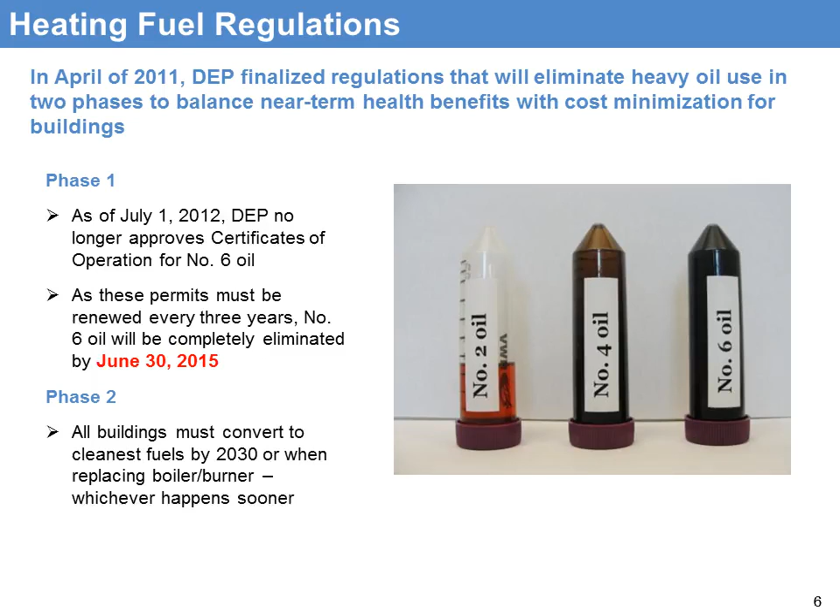When the regulations were put into place, the city and the mayor's office also put together our program in an effort to basically help folks with this transition period. We provide free technical assistance through the process. We'll guide buildings through the conversion, whether it's liaising between all the city agencies, understanding the regulations, the timelines, and everything else that you need to strategize which fuels you might need to go to. We can help you with that.

We'll also help connect you to any financial assistance that's available, whether it's incentives or financing that's on the table right now through partner organizations. And we've developed a website that a lot of folks use, not only to get information about the conversion process, but also to get a wealth of information about incentives. And of course, a lot of folks check our Spot the Soot map, which basically maps out every single building in New York City that has to comply with these regulations.

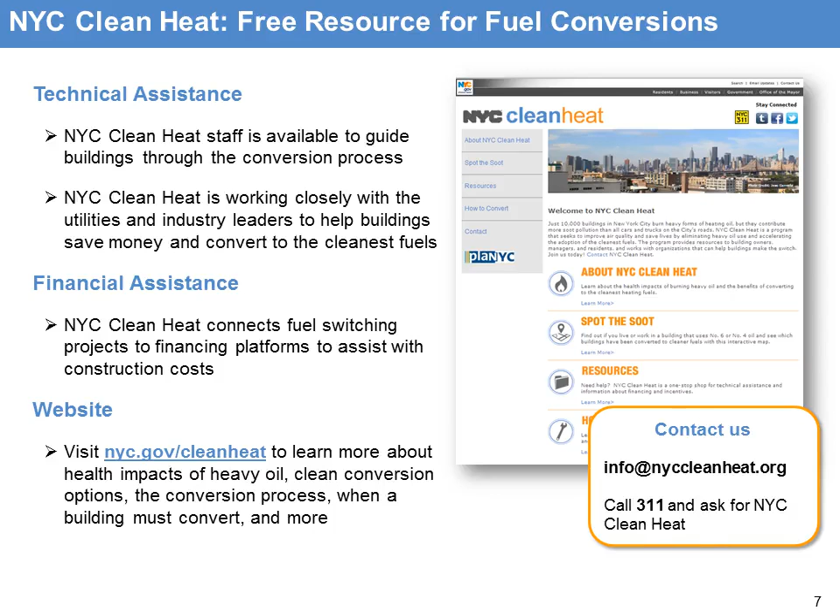Some of the target fuels that we're encouraging folks to look at are obviously the cleaner ones. As I said earlier, 6 is already finished by this summer, 4 oil is on its way out, so we never recommend those two as an alternative. We look to the cleanest fuels as a great way to transition: ultra low sulfur number 2, biodiesel blends, natural gas, steam, and any other alternatives that are out there are all great choices.

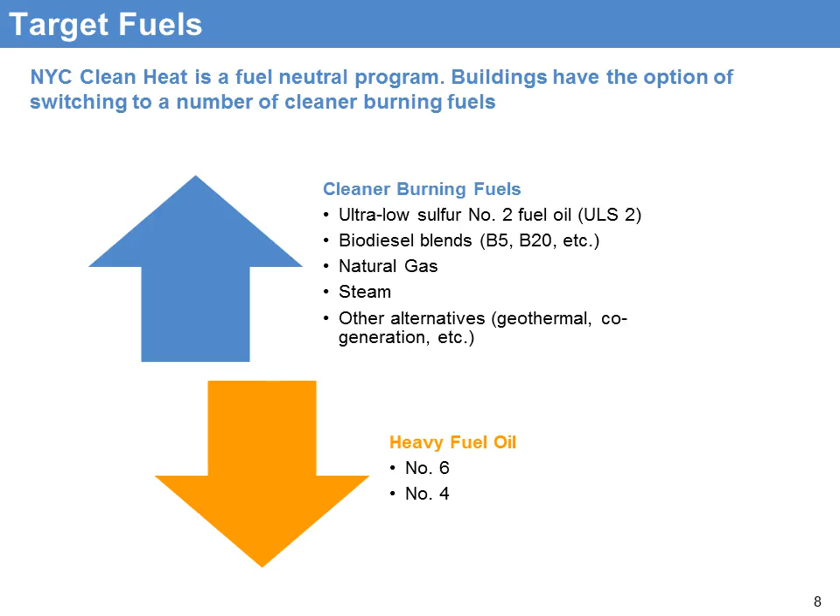Now, just getting into some of the consequences of not complying with these regulations. If you do choose to operate on an expired permit — and we're talking about folks right now that might be on number 6, that are basically behind a little bit and still need a little more time — DEP is enforcing these regulations strictly, especially during these last few months.

So the first thing that happens is you'll receive a notice of violation if your permit is expired and you're operating your building on an expired permit. You'll be mandated to comply within the allotted time to convert to the cleaner fuel.

The next step of the enforcement is that you will receive a cease and desist notice from DEP. Now, along the way, I know DEP will send out inspectors, and you'll be notified and given plenty of time, but they are stepping up their enforcement.

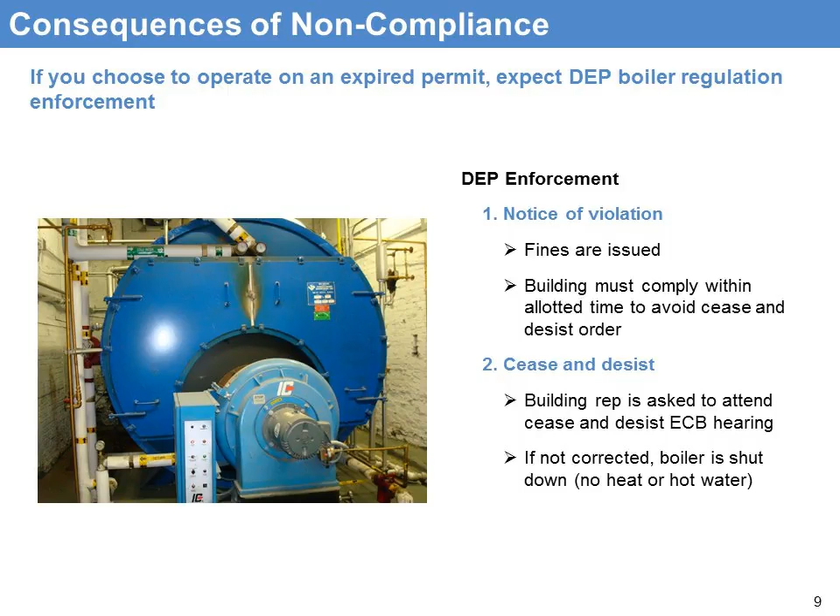Once you are issued a cease and desist, you'll be asked to go in front of an ECB judge and basically told how to correct your issue within an allotted amount of time. A cease and desist order, which DEP can then act on, basically means shutting down your boiler, which means no heat, no hot water. We don't want that to happen to any of the buildings we're working with, and certainly DEP doesn't want to shut down anyone, but they will if they have to.

There are additional consequences. In addition to being out of compliance, there are other consequences for your buildings that a lot of folks don't always think about. If you're operating on an expired permit, there might be some insurance implications — it's a non-compliant building.

God forbid anything happens, banks are starting to look a lot more at compliance issues related to buildings when giving out mortgages or providing loans to tenants or potential co-op members or new folks coming into the building. It's also a reflection of how the building is being managed.

These regulations are not new. These changes were known well in advance, and we are hoping folks would be able to plan in advance of the regulations hitting.

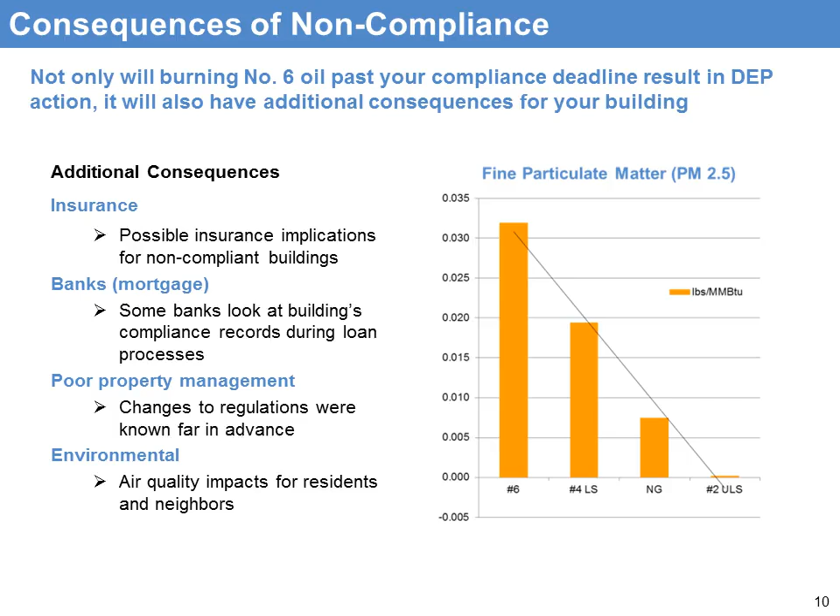So getting down to finalizing your conversion, as I said earlier, we're in these last two months. By June 30th, there should be no more buildings on number 6 oil. We recommend some quick hits for buildings to understand where they are.

You might be in the process of converting, or you may have recently completed a conversion. It's important that you understand how the DEP and us view your building, and you should make sure all your paperwork has been completed. You should double check if your engineer or contractor has done everything that was in the contract, and you want to make sure you're not getting fined even though you completed your conversion.

One really quick check you can do is go to our website at nyccleanheat.org, spot the soot, and there you'll find every single building that's permitted by the DEP. The DEP helps us to update this map regularly, so you should check there what type of fuel we have you listed as, and make sure it's correct. And if it's not, please reach out to us.

It's really important that you guys are in touch with us as much as you can be to let us know if you're having any issues or problems. That's our job, we're here to help you. We don't want anybody to be fined, and neither does the DEP. So we do everything we can to reach out to a building before anything happens, and we'd like for you guys to come to us first.

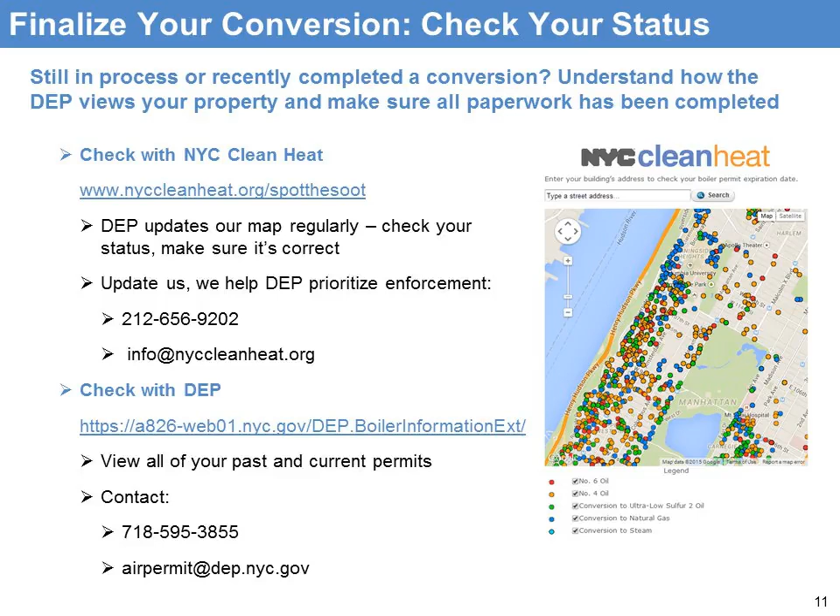We have less than 600 buildings remaining on number 6 oil across all of New York City. Now this is huge - we started out with over 5,000 buildings across all of New York City, and we're down to the last 600. So really these buildings are the last of the last that still need to comply by June 30th. No more buildings will be allowed on 6, so expect strict enforcement in these last couple months.

Please contact us if you're still on 6 oil today for an expedited conversion plan. And if you're in the process of moving away from 6 oil, such as waiting for natural gas, you need to consider getting into compliance first. Even though you might be actively converting to natural gas, that doesn't mean you're still allowed to use number 6 in the meantime. So waivers, extensions, or any sort of special treatment will not be given to anyone in the process. If your permit is expired, you should expect enforcement.

What's really important is that you should also understand where you are in the regulatory process. I went over earlier that basically the first strike is you'll get a notice of violation. The second and last strike is that you'll get a cease and desist. You should know where you are in that process to avoid both of them at all costs.

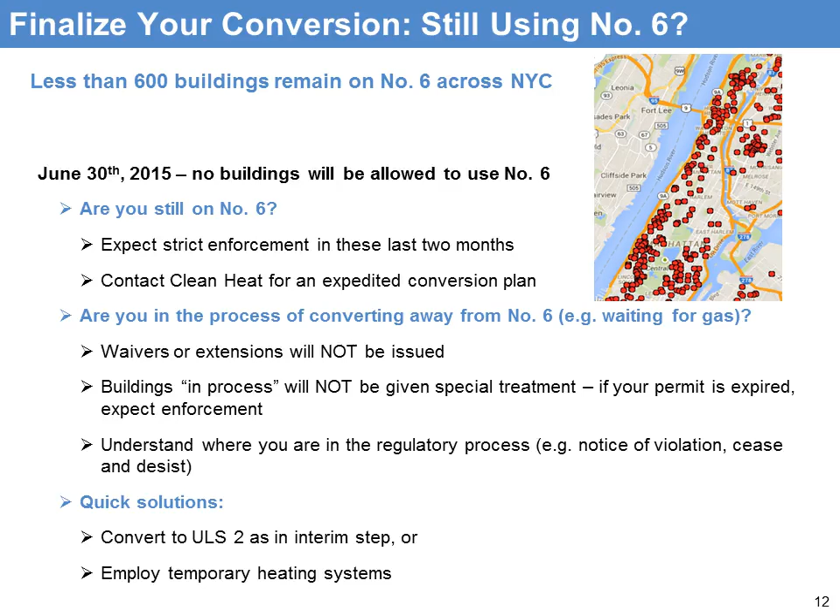Some quick solutions to resolve those issues might be to quickly convert to ultra-low sulfur 2 as an interim step. And possibly, although this is not the best option, sometimes it's the only one - you can employ a temporary heating system to basically get into compliance while you're waiting for your conversion to finalize.

The first thing that needs to happen is a building that's converting away from 6-oil files an amendment. This should be filed by a licensed professional. Then they need to submit an affidavit once the work is completed. And then as part of the renewal process for your triennial permit, you have to submit an inspection request along with a performance test done by a qualified combustion tester.

Just a small note here: if you are on 6-oil and operating on an expired permit, you must receive approval from DEP for the fuel conversion prior to filing for that amendment and prior to submitting your inspection request. And all of this can be done online, and DEP encourages everyone to use their online system. It's much faster and a lot more streamlined. So go to nyc.gov/DEP/CATS.

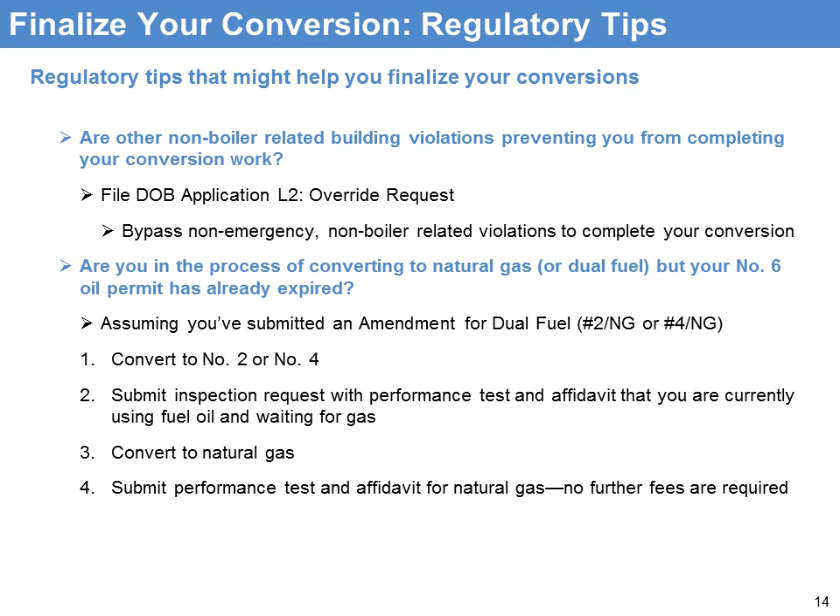Again, I'm stressing the timelines here. We all know natural gas conversions take a really long time to complete - 9 to 18 months is probably a conservative estimate, sometimes even longer. So unless you're in the absolute last stages of your gas conversion and still on 6-oil, chances are you will not be able to make it in time. I've seen cases where buildings have completed their gas conversions and are just waiting for the gas to be turned on, sometimes waiting a few months for that.

If you're somewhere in the middle of the process - I spoke to a building a couple of days ago that just completed their interim inspection with Con Ed - from that point on, you still have many, many months ahead of you, and there's no way you can comply with the DEP regulations in time. So you need to take that interim step: we recommend going to 2-oil first, and then wait for that gas to be completed.

For converting to 2-oil, it's really quick. We have 4 to 6 weeks here from planning to construction. But really, if there are no major issues, this can be done a lot faster and can be completed within the time that we have left here.

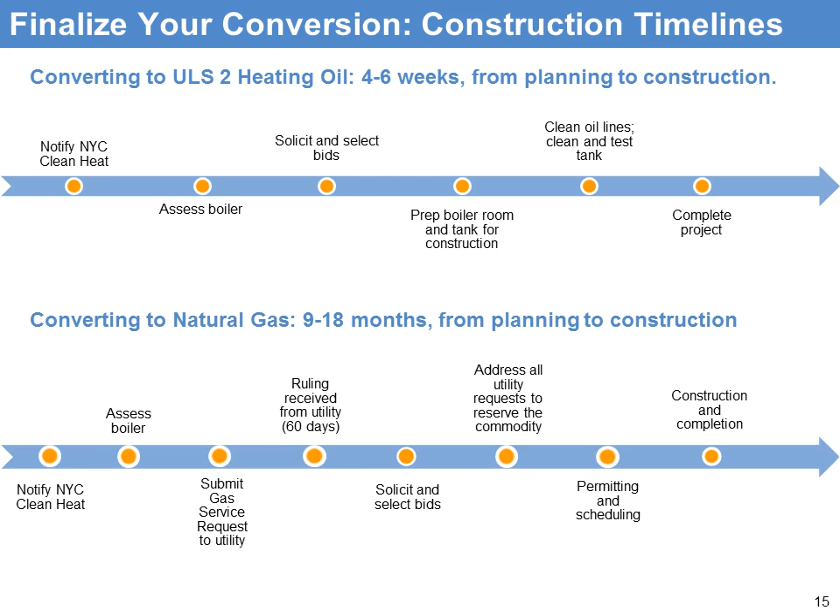I also wanted to address number 4 oil. Number 6 is really the priority right now, but for number 4, there are still a lot of opportunities out there for folks that are burning number 4. If your property is still using number 4 today, you should really consider other alternatives and cleaner options. Not only are they more efficient, but they're also a lot cleaner. So even though 4-oil is still being permitted, and you're allowed to use it for the time being, unless you have to replace your burner or boiler, you should really look to other alternatives.

Cheaper, cleaner alternatives like ultra-low sulfur number 2 and natural gas. Gas prices right now, as you all know, are at their all-time lows. Ultra-low sulfur prices are also pretty cheap these days. They're coming down a lot. At times they're even cheaper than number 4. The prices for number 4 will continue to rise as fewer people in New York City use it.

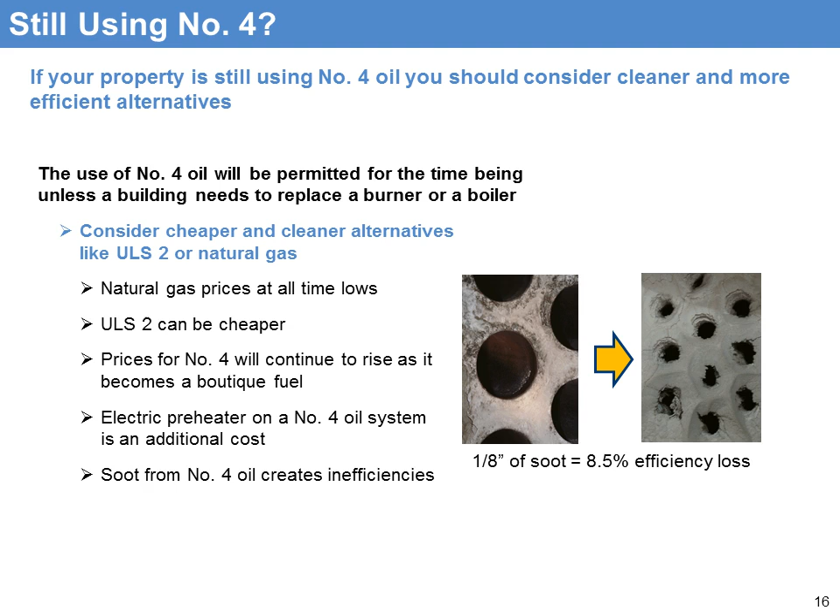Of course, there are preheater issues that come up with 4-oil that you don't have to deal with and pay for when you're on 2-oil. And then lastly, there are inefficiencies. Not only do we see the soot come out of the stack, but it's also clogging up your heating system, clogging up your boiler tubes. Just a little illustration here, you can see that just 1/8 of an inch, which in some cases can happen really quickly during the heating season with 4-oil, gives you about 8.5% efficiency loss. So it's really important to consider cleaner options.